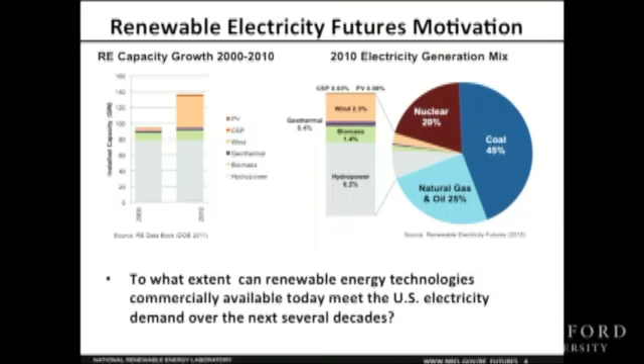And it's really quite enormous, and that's just the tip of the iceberg relative to the fact that there are about 115 countries that have some kind of renewable electricity law or goal in place. Renewables have really become—I'll change it from what used to be thought of as alternative to just being thought of as renewable energy. So it's no longer the alternative aspect. When you look at the annual growth rates in the United States or elsewhere, it's about 50% of new power additions each year. So it's really matured substantially.

So the questions we really had were a technical feasibility analysis. There are really 3 sub-questions here, but to concisely talk about them: can we meet load with the various supply options that we're going to look at? What's involved in integrating all of that new supply into the grid? That's a very simple question, but incredibly complicated to answer. I'll get into some of that and some of the variants that we looked at.

And can we exercise some really leading edge models with unprecedented both temporal and geographic coverage for the United States, which really haven't been exercised like this before? And then really explore what are the constraints, what are the synergies, what are the challenges, recognizing again that we're not going to do an in-depth policy study.

And the basic set of assumptions, again, driven by the demand side of the equation. We had a whole energy efficiency and demand team run and led by Donna Hostick out of Pacific Northwest National Laboratories. That team actually referred back to the National Academy's work on potential for energy efficiency, did some thinking deeply about the penetration of electric vehicles or plug-in electric vehicles, and came up with essentially a fairly aggressive baseline scenario.

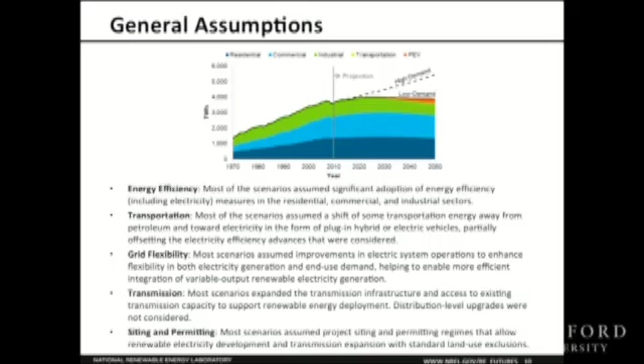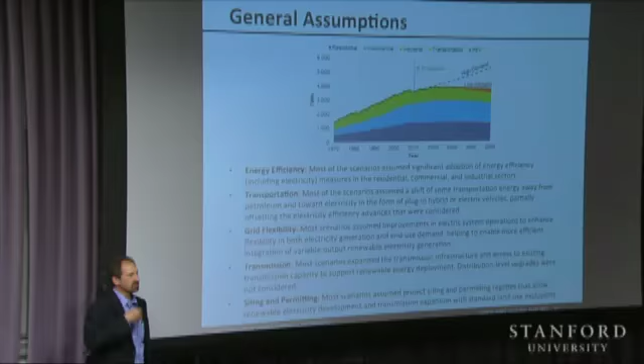Going out to 2050, this is essentially decreasing electricity demand, then with a slight increase from the transportation sector, making it essentially flat. That's fairly different than traditional growth scenarios, which have energy consumption essentially proportional to growth in GDP, and you would see 0.5 to 1 to 1.5% growth, which is our high demand scenario.

So there's a lot of assumptions built into the demand side of the equation that we put into our reference scenario, or baseline scenario, that have to do with that. And then we want to look at variance around that. Okay, so that's a very solid place and a key thing to remember as we go forward.

Resources - these are the maps, many of them that NREL produces. In fact, we update these relatively regularly. This is a kind of coarse scale map at the national level of biopower, wind, solar, geothermal, direct solar, so concentrating solar power is CSP, and hydro as well. There are details of this at very fine spatial resolution on the NREL website, and even more detail in the Western Interconnect and the Eastern Interconnect that we've used for other studies as well. But this is just a quick synopsis of that.

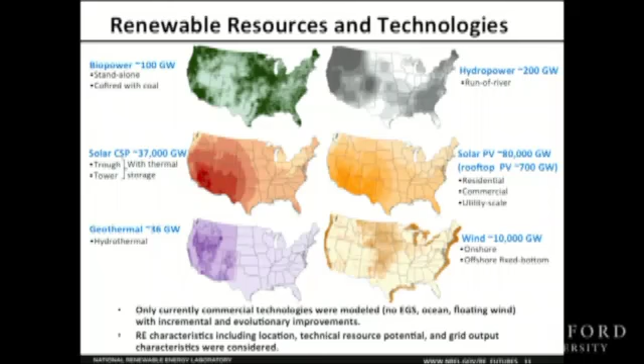I think one of the key takeaways to observe on this is the enormous size of the solar resource, which many of you are familiar with, but to give that some context, that's 80,000 gigawatts - I think I actually have a mistake in my slides going forward with the wrong number, but that's pretty enormous. And the other ones - this will come out because we actually did a resource constraint scenario where we looked at, well, what if this is wrong, or what if you can't get to it, or what if there are siting problems or development problems, and that'll be another insight.

So that sets the background of what we did, and let me just focus then on highlights of the results and then go through some of the scenarios.

So the first key takeaway, which was an output of the analysis because it wasn't predetermined, was: can the system actually meet hourly demand at 80% total renewable generation in 2050? And the answer we found was yes. You could, in fact, keep and meet today's technical requirements - ancillary reserve requirements, contingency reserve requirements, etc. - with 80% renewable energy on aggregate across the country, renewable electricity.

Okay, and so you see here what the actual power plant map and transmission map would look like for the 80% incremental technology, unconstrained transmission scenario. And you do note quite a difference. You see the build out of a lot of solar in the west, a fair amount of wind in the middle, a fair amount of biomass throughout the east, and then a significant amount of new transmission.

Now I'll contrast that with some scenarios where we in fact constrain the transmission, and you'll see some differences here. And then I'll actually show you some very nice visuals which will show you the build out of this, but also the hourly dispatch of it as it goes through a year, which is actually fairly insightful if you're visually inclined. So that's one of the most fundamental takeaways that came out of the study - this looks like it's technically feasible. We should look at it in some more detail. And what else can we learn?

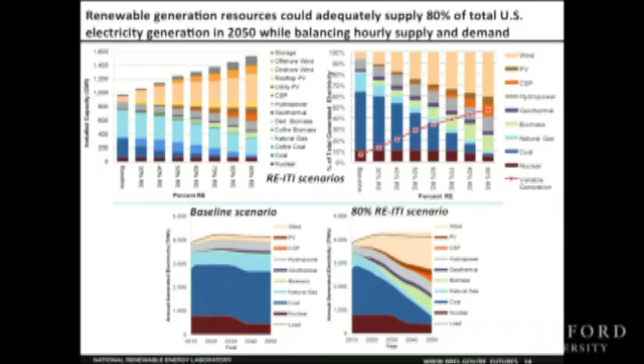Why is that? Because as an electricity modeler, you give less capacity value to the variable renewables as they increase their penetration going forward. So the 50th marginal percent of wind gets less value to the system than the 25th marginal percent of wind. That's because of the variability and predictability of wind, et cetera. That's all been looked at in a lot of detail, and there are a lot of references I can help you with on that one.

Hopefully you can read these in the back. These are stacked charts going from nuclear, coal, co-fired coal, gas, co-fired biomass, dedicated biomass, geothermal, hydro, CSP, utility PV, rooftop PV, onshore wind, offshore wind, and storage.

The other thing I failed to mention verbally in the modeling work is that we used a second NREL model called Solar Deployment System Model, Solar DS, to actually model where the distributed solar would be. We did that exogenously, put it into this one, and then solved the rest of the system.

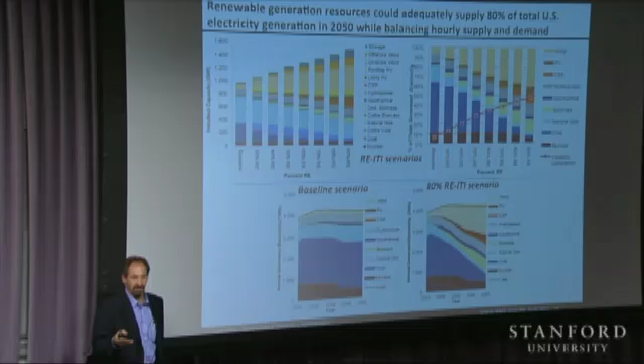The other piece here is this is the percent of total supply, and more importantly, this red line, which is the percent of variable generation as a function of the scenario. One of the important things I always emphasize with this graph, and in the discussion of the study, is that when we talk about 80% scenarios, it's 80% total renewables, not 80% variable renewables.

So you can see here in the 80% case, it's about 42%, if I remember the number correctly, variable renewable in that case, although it's 80% total. Why? Because we have hydro in there, we have baseload biomass in there, we actually have concentrating solar power, CSP, with storage so that it's dispatchable in there. Even in the 90% case, it's only about 45, maybe 46% variable renewables. So that's also very important to remember in the back of your head: we're not analyzing scenarios where it's 100% variable. It's less than 50%.

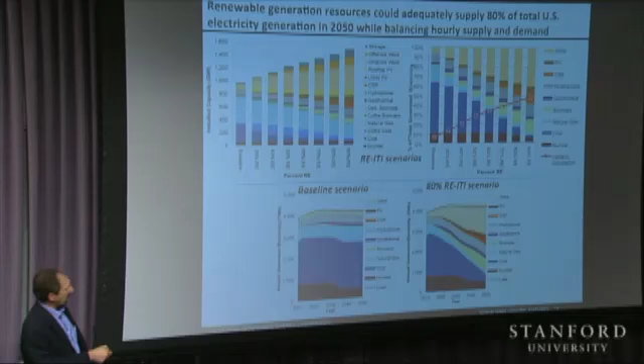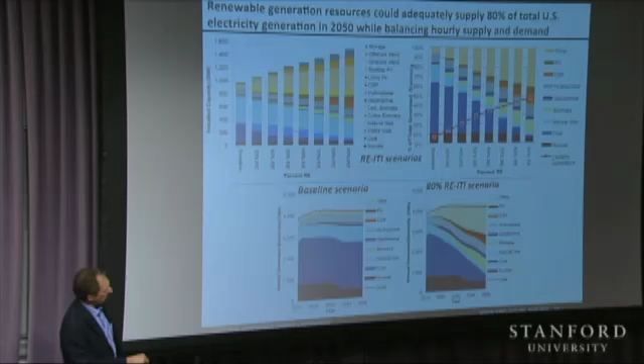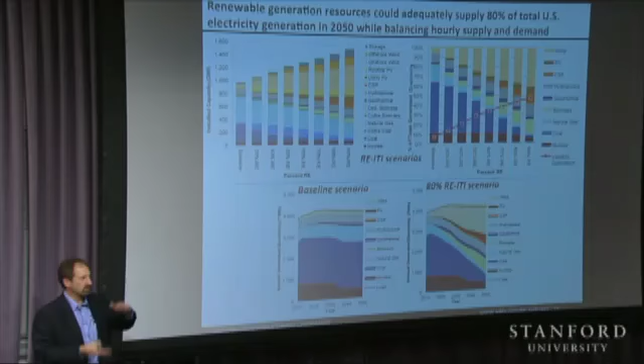Then here is the energy of the baseline scenario where you see, again, nuclear, coal, gas, and then the renewables, with flat demand going forward, relative to the 80% unconstrained transmission scenario where nuclear phases out, coal phases out quite a bit, gas slims down, and then you build up renewables on the side. This was done pre a fair number of changes here in the 2010, 2012 timeframe where you see a lot of switching between gas and coal.

It really wouldn't have a lot of impact out in the 2050 timeframe. It would reset the start point quite a bit, and I'll talk a little bit about whether or not fossil fuel prices impact the results of this study. The answer, just so you can think about it, is not really. The simple way of thinking about that is that it's really quite a small part of the overall generation.

Another key result, a synthesis across many, many different scenarios, is that there are many different combinations of renewable resources and technologies available in the United States that could potentially supply 80% of renewable electricity power. That's important to realize because each state has its unique set of assets, each region has a unique set of assets, and there may be preferential treatment toward a more distributed future, a centralized future, or protecting certain land areas or water areas. That would change the mix. So the question is, is there only one solution or a whole variety of potential solutions? The answer is there's a whole variety of potential solutions.

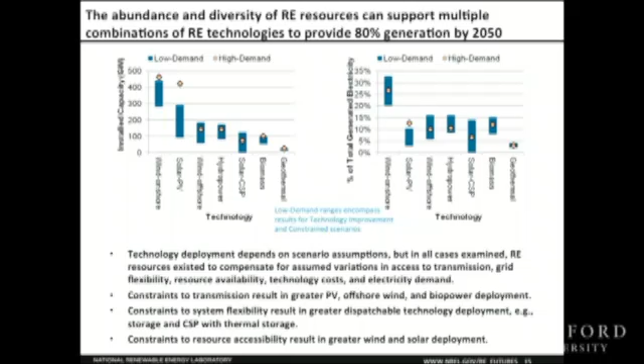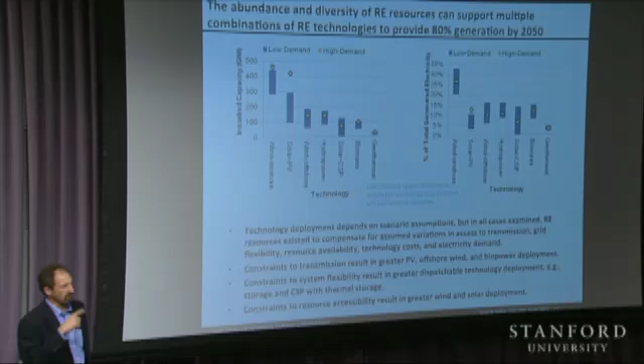There's some notable pieces, for example, solar CSP. There's a scenario where we calculate that zero CSP is actually added to the grid. Now, it's not very feasible given what's already in the pipeline, but economically, that's kind of put there. But you could also see that you could build more than 100 gigawatts. That's dependent upon technology innovation going forward and the competition with other renewable resources, as well as, in particular for CSP, the availability of transmission to move it from the desert Southwest to other demand centers.

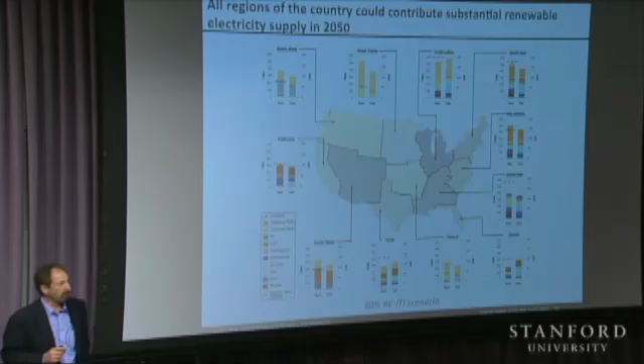One of the other key messages for us was really captured in the geospatial distribution of the energy supply. I'm going to show you a second map along this line with constrained transmission, but this one captures a lot of detail.

Let me use an example here, California. What you have on the left is the generation, and on the right is the capacity, and the little dashed line is actually the 2050 demand. So in California, basically, you meet the demand on an annual average from resources available in the state. Now that's a different situation for the Northwest, where in fact it oversupplies and therefore exports.

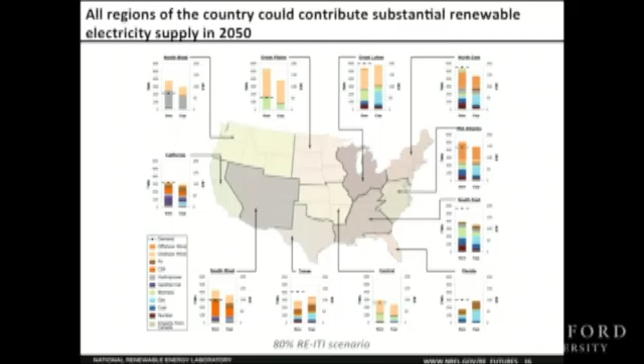Similarly for the Great Plains, where there's a lot of wind and therefore a lot of oversupply. This color map is the same - that's wind above that line, which is being exported. There's some deficits in Texas and Florida, but in the Northeast, from the offshore wind, they actually have a surplus and export. I'll show you that on a couple of visuals going forward. So this is a really important map because it shows regionally where supply is being met by relatively local resources, or where the trade flows, if I could use that term, between regions.

I deviated from the normal renewable electricity futures talk to put this slide in because I think it's really important. This comes from work we did for what's called the Clean Energy Ministerial, which is a group of 23 energy ministers that get together. Last year they asked us to do a comparative international case study of the best practices for integrating variable renewables.

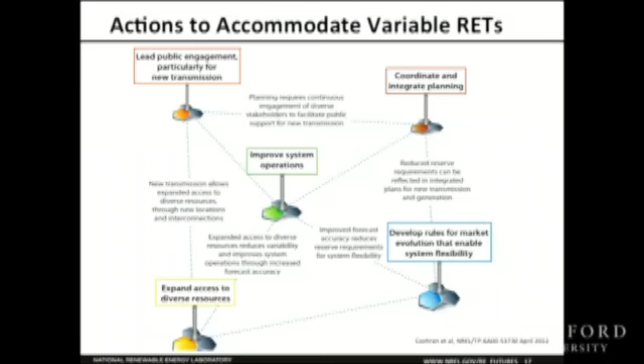This was kind of the visual map that came out of it, and there are 5 key steps involved, everything from expanding diverse geographic resources, enlarging balancing area authorities, developing rules for flexibility of markets, leading public engagement, particularly for transmission build-out, as well as market rules and things like that. I put this in as a reflection of what I'm going to talk about now, which is really about what a flexible system means if you're ever going to move toward a very, very high renewable electricity penetration scenario. This kind of gives the roadmap. That's a whole separate set of publications, but I think it's important to keep these in mind.

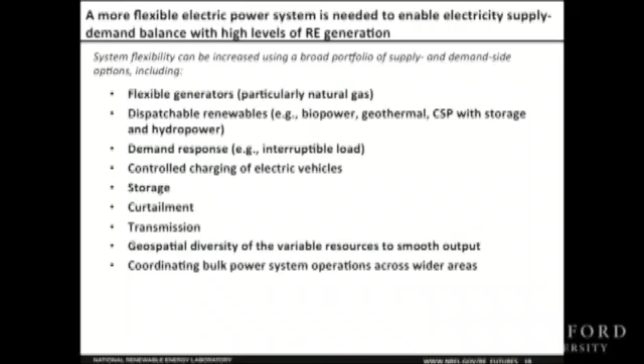So this is kind of, I'll call it a vision, just a bullet list of a lot of those options for flexibility. Everything from demand response - and we'll highlight some of those demand response aspects in the study - increased flexible generation, particularly from fossil resources, and I'm going to show you some detail of what that looks like. That raises a lot of hands talking to current utility operators in the U.S. Less so if you talk to them in Ontario - just depends on what's standard and what's practice. Storage, and of course coordinating power markets, etc.

So this is a really interesting set of results, and there are two extremes here. One is a set of peak demand days - hourly calculations from July, 3 days in July, actually 4 days in July, and an off-peak spring day. In a peak scenario, in the baseline, everything runs as traditionally designed. You have baseload plants, lots of baseload coal running flat out, hydro which ramps, then natural gas, 2 flavors of natural gas, and then a little bit of renewables on top of it, and this is the load requirement.

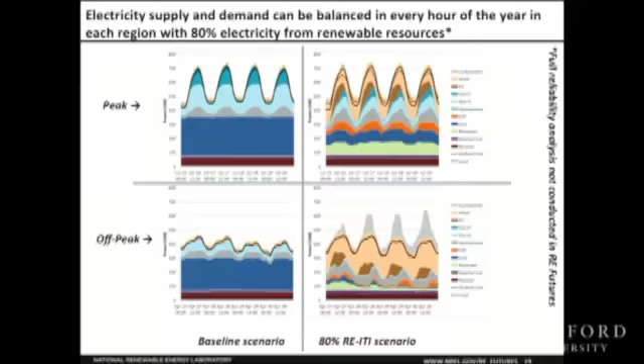The load requirement that we had is the black line, and then we introduce some demand response, some load shifting capability in the scenarios, and that goes from about 15 or 18, 16 gigawatts to possibly as high as 30 to 50 going forward. That may actually be a conservative scenario and set of assumptions.

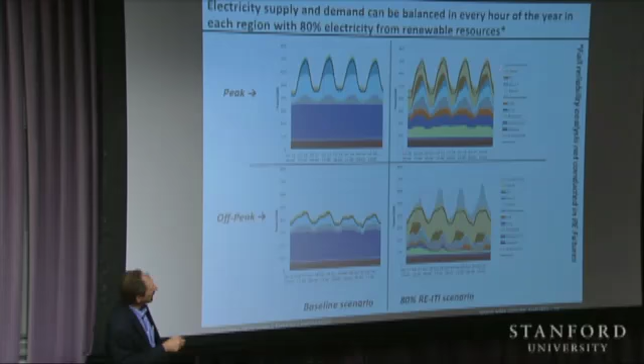But in this 80% renewable scenario, you still have some base load-like plants, but then you build up a very different stack of generation profile, still meeting the overall demand as it goes forward, and then you get this little slice of gray at the top, which we call curtailment.

It was one of the interesting assumptions we talked about for a long time, which is, what do you do with excess electricity if you have it? In this study, we chose to just call it curtailment. We didn't put it back in the system, we didn't recycle it, which would obviously be the economic optimal way of thinking about it. Here we just said it's curtailed, it's got a cost of curtailment, rather than thinking of it as a zero cost resource. So this all looks relatively manageable.

When you convert to an off-peak time, it looks very, very different. Here you see lots of curtailment, virtually no coal being used, and a fair amount of cycling, on and off cycles, of almost all the resources. It's an operationally very different challenge, but technically it's still feasible to do that. And again, those are the 80% ITI scenarios.

Sally, would you remind me how much time till 5 o'clock? 5:15? Like 5 minutes past 5. Okay, and then that will give us like 10 minutes for questions. Okay, alright, I'll keep going.

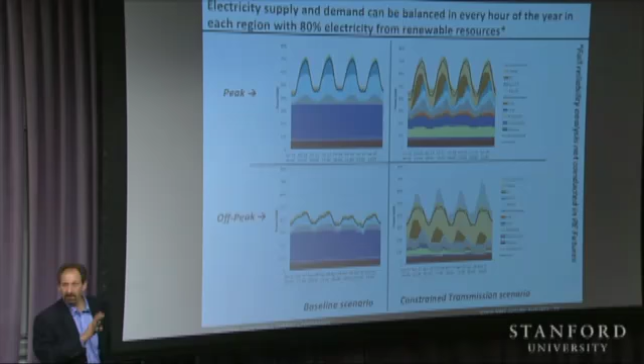And then we've got the constrained transmission scenario as well. Here you see again the upper curve is fairly regular. The lower one has significantly more photovoltaics in it, almost no concentrating solar power because you can't get the power from the desert Southwest to the demand centers. And then also some more offshore wind, but I'll show you that in more detail.

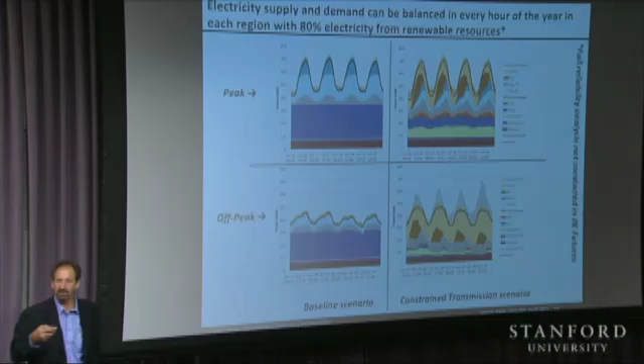Each of these solve, if I can use that term, over 8760 hours. They meet the reliability requirements of today's North American Electric Reliability Council going forward on an hourly basis. What this also means is that the flexibility requirements in our standard scenario on fossil generators are very different. Again, I mentioned Ontario ramps their coal plants when they have them, they're phasing them out, at 80 to 90% of a ramp rate of full capacity. That's very different from how our coal plants have been designed and operated. It's just a different paradigm of how you'd go about doing things.

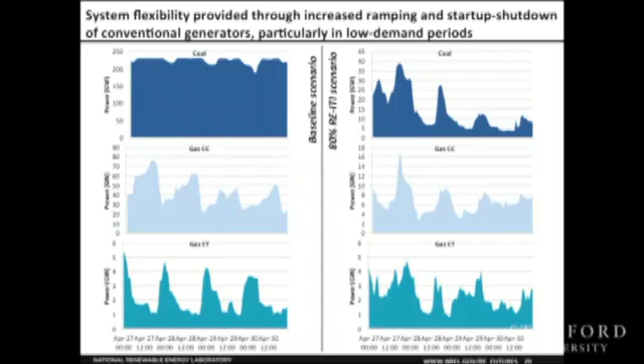But there are two things here. This shows gas combustion turbines, combined cycles, and coal in the baseline scenario, and then in the 80% unconstrained transmission scenario, and you see a lot more variability. You also see a lot less energy, of course, because most of the energy is coming from renewable resources. This looks like a headache to most traditional coal plant operators, not to some of the others who've been in different areas. Even combined cycle ramping may be very fast for old vintage combined cycle fleets, but not current vintage ones being sold in the system today. Combustion turbines are pretty used to that kind of situation.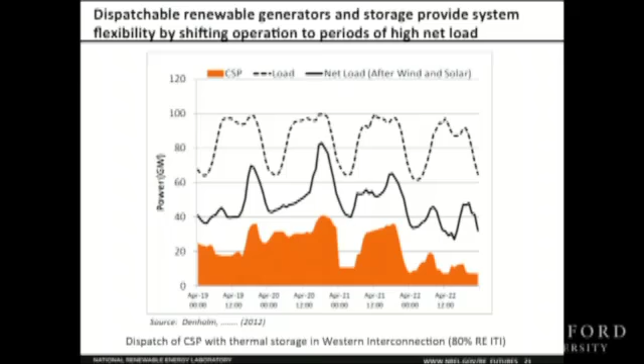This shows just a highlight of how concentrating solar power with thermal energy storage actually dispatches. So this is a load curve, this is the remaining load curve after the other variable renewables are subtracted from it. This shows then, if you actually have CSP with thermal storage, how it will dispatch into the peaks because it's economically optimal to do that, as well as technically feasible. Just another small highlight of things. A couple tidbits on then constrained scenarios.

So what we wanted to do was ask the question: have we been overly optimistic in thinking about an economically optimal situation where you could actually build transmission? That may not be the right question. The real question is, if you could not build transmission—because it's expensive and very slow to build out due to interstate rules and all the constituents involved—could you still meet 80%? And it turns out you can.

In our baseline scenario, it's actually an enormous amount of new transmission—110 to 190 million megawatt miles, about double our current transmission system. People might say, well, that seems like an excessive buildout.

So what if we constrained that? We essentially limited any new transmission to existing corridors, not new ones, and no new interconnection ties—so ERCOT, for example, stays isolated. Then we reran the scenarios and asked, can you actually meet the 80% requirement?

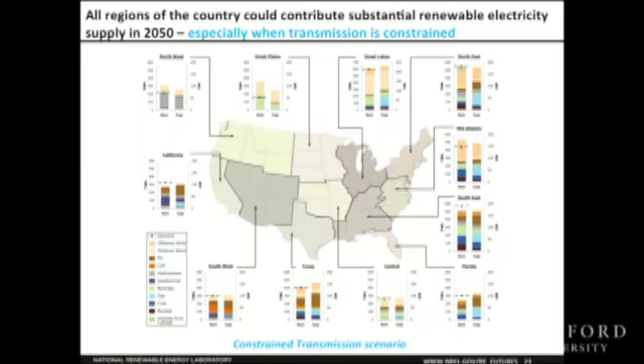The answer is yes. What do you trade off? You trade off local resources for faraway resources, and that's a trade space people need to be aware of and think through—how much PV goes on a roof, how much local wind or local biomass is developed versus, say, wind in the Great Plains with a transmission line across states. This is a complicated set of comparisons, but I wanted to spend a little time so you can see some of the trade spaces we found.

in those constrained scenarios—either constraining transmission or constraining flexibility. What does that mean? It means we increased the flexibility requirements on the system for dealing with the amount of renewable generation, so the capacity value of renewables decreased. Reliability requirements actually increased quite substantially, and the flexibility of fossil fuel generators decreased.

So you can see more operating reserve requirements in that system in terms of total capacity, because each reserve plant contributed less to the overall system. You can see some of this trade space quite a bit.

In particular, when you constrain transmission, this went from 120 down to about 30 million megawatt miles. You can see comparable reductions in T&D losses, etc. There's also quite a bit of storage—new storage being built goes from about 20 gigawatts today to about 120 to 150 gigawatts. So there is new technology being built going forward.

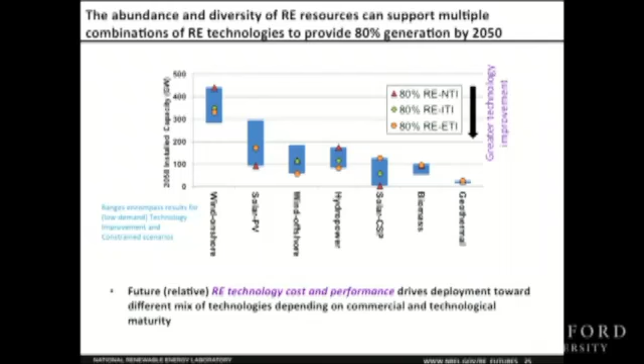This shows about the same graph as before, but it shows the impact of those technology assumptions in terms of where things go. With no technology improvement, CSP doesn't contribute significantly to the system in 2050, but with evolutionary technology, it really does contribute quite a bit.

So there's a lot of technology improvement opportunity in the CSP world, and the other resources are a bit more mixed. We pretty much use all of the geothermal available and almost all of the biomass available in any of those technology scenarios as well.

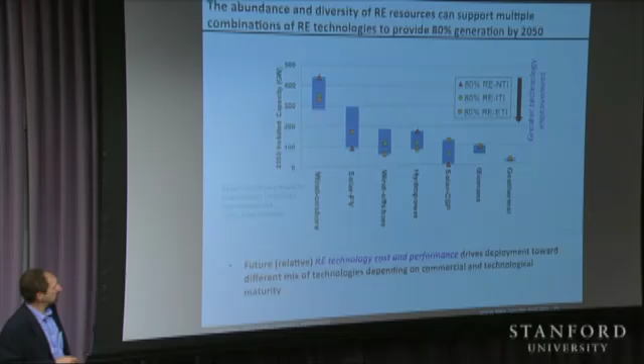A couple of the outputs, just to think through it. So one would anticipate that we see concomitant reductions in greenhouse gas emissions from the power sector. We do see that, about 80%, either on a burner tip level or a life cycle emissions level. We also see reductions in water demand and use in the power sector, which also could be an increasingly important aspect to think about as we go forward.

And then we're always asked, well, doesn't that use a lot of land? So we looked at those metrics as well, both for fully disturbed lands and marginally disturbed lands. You can see some of the comparisons here relative to golf courses, corn production, and major roadways. Here's the numbers - I think that's up to whoever wants to read the study and think about what that means for your locality or for the country relative to the trade spaces of having the greenhouse gas reductions, the water reductions, et cetera.

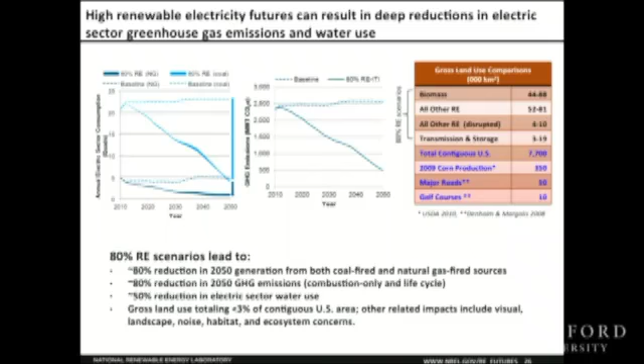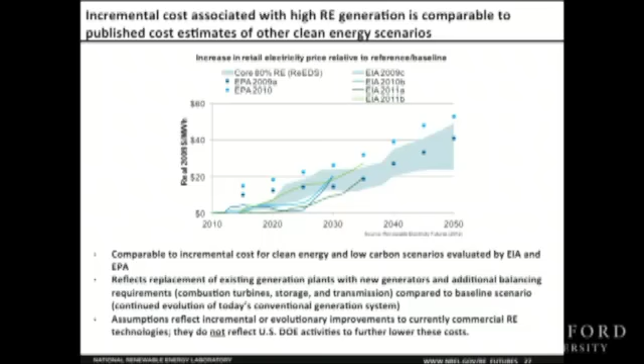Economically, we also looked at the impact on direct costs on electricity prices. These are average annual electricity prices in the different scenarios. What you see here is a comparison against a number of different studies that came out from either the EPA or the Energy Information Administration, relative to the range across all of the Renewable Electricity Futures Studies, which is the light blue swath in the back. You can see that our calculations are in the same ballpark, and in fact potentially lower in the outer years. Again, this depends upon the energy technology cost assumptions much more than on the fossil fuel assumptions as well.

What we didn't include in these was the cost of the energy efficiency investments. We, of course, didn't look at household expenditures because we didn't do a full economy-wide model. So these are direct expenditures only, including all of the transmission upgrades or new builds that would be in there as well. So it looks fairly reasonable relative to the other analyses at that time and would need to be looked at in much more detail going forward.

We also looked at the sensitivity of the different prices relative to different input assumptions. The key thing to look at, as I think about it, is what's the sensitivity in the price relative to technology improvement, constraining the transmission, or any of the other constraints, demand, or fossil fuel prices. And of course, because fossil fuel doesn't contribute a lot, the sensitivity is relatively low.

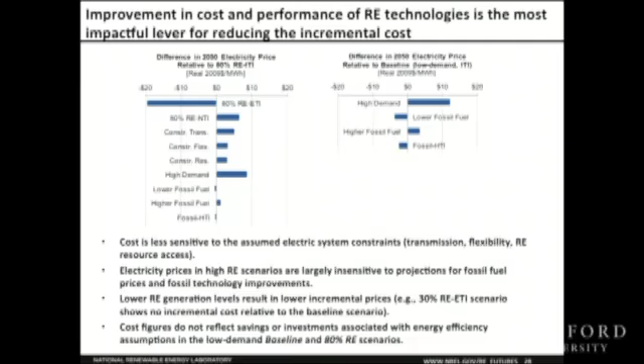Demand drives up price, as you would expect, because you'd have to build more supply, and a lot of that supply has low value. But the most interesting part, particularly for those sitting in a research university, is in fact the enormous potential impact of technology innovation. It really is, I think, motivation for us to just work harder, particularly in today's low gas price environment.

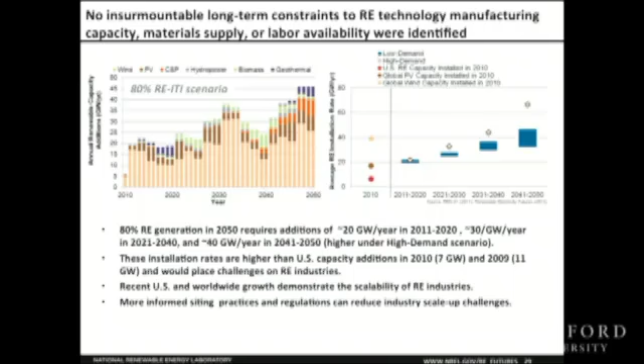We looked at the manufacturing capability. This just shows an annual build out of what the annual installations might look like, again, on an economic optimization, not on a business perspective - somewhere between 20 and maybe as high as 40 or 50 gigawatts. That's not really unsurmountable compared to both US installations as they have been, but also worldwide installations and worldwide production capacity as they have been. So the takeaway was, industry probably could respond to that and would actually probably like that, to be able to really grow and work that well.

The other piece I want to spend a second on is really this impact of high demand. I think it's really important because those base assumptions of really implementing energy efficiency tend to get lost in the messages because it's a study of renewable electricity futures. But as the national academies have done, and many studies out of here and elsewhere, the energy intensity of the US economy is enormous compared to most other countries. And while California leads the pack and has done for decades, the rest of the country has a long way to go to really catch up on this.

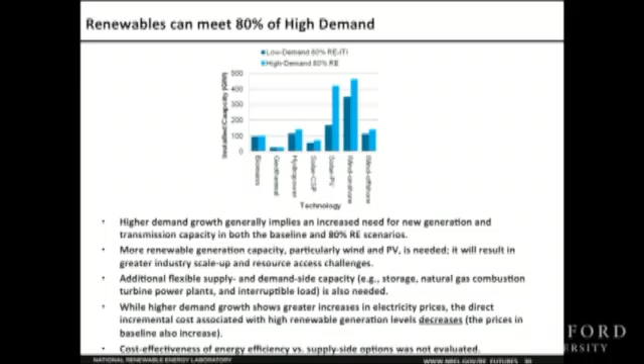This just shows the impact on the requirements for the different technologies going forward. We would have to build a lot more supply and deal with a lot more of the flexibility integration if we were not to curb our increase in demand. I think it's worth thinking through what that really means, particularly given overall national consumption levels.

So key results, there are 4 here. I'm not going to read through them. I think the key thing is that we found in a technical assessment that up to 80% renewable scenarios are technically feasible on an hourly basis, meeting today's reliability constraints and requirements. A number of different constraint scenarios and sensitivity scenarios also indicated feasibility at the national level for meeting those kind of renewable electricity futures. Such a future would require more flexibility both in the operation of the system, but also going forward in the policy and market design elements of that system itself.

The abundance and diversity of US resources really allows us multiple different pathways. We didn't decide on a given pathway. What we wanted to say is, are there multiple pathways? And I think the answer to that is absolutely yes, given our resource base.

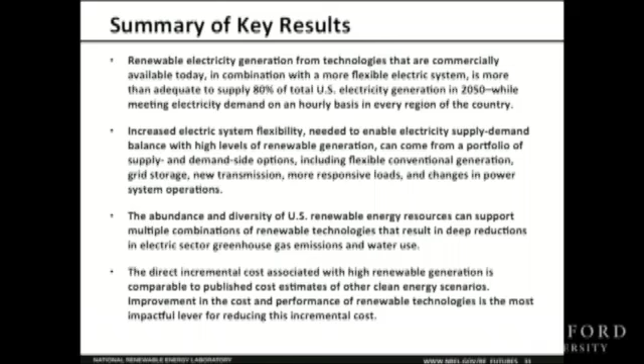The incremental cost is actually comparable to other analyses of decarbonization of the power sector done at that time, and might be the same for those done today, which are not enormous—they're real, between about 0.5% and 1.2% per year going forward. So they're not a large leap, and that's on the power price, not the total cost of power, because if you look at reduced demand times the quantity of the price going up, actual expenditures may or may not be flat or decreasing depending on your own individual use.

Where are we going from now? We have a lot more rigorous reliability assessment to do—sub-hourly, looking at frequency response, looking at contingency outages and things like that. We have a lot of work to look at the market flexibility issues and the policy side of that equation going forward. We're in discussions with DOE now about what that might look like. And then, of course, continued work on the technology innovation side, which is one of the most important factors on the cost of realizing such a future.

So let me skip through that. What I really want to do is, while we do questions, show a couple of visuals, if I might. I hope I can get these up.

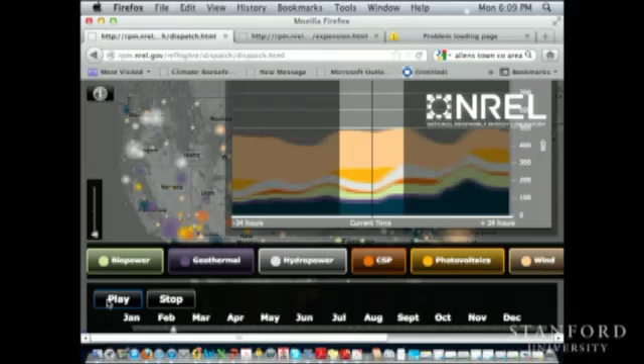It's nrel.gov slash REFutures. So thank you for your attention. Thank you for inviting me out, and I hope that captured the highlights.

Okay, questions? Okay, how about you, Charlie?

Hey, that's a great study, a lot of valuable insight. I'm curious about the storage energy capacity—it has about 110, 150 gigawatts of power capacity. How long is that discharge? A couple hours, 6 hours?

That's a good question that I don't have the answer to off the top of my head. We can dig it out of the actual energy supplied by it. Off the top of my head, I think that it's less than...

It's less than about 8 hours per day on average total, but we can look at the detail and get you that. The trade space between storage and demand response, when we took on this study 3 years ago, was a fairly broad unknown. We restricted storage to well understood, well characterized technologies—no advanced batteries, just things like pumped hydro. Demand response at that time was a pretty big unknown. There's a new technical feasibility study of demand response for the country coming out soon by DOE, and I think our estimates here are actually fairly low relative to what that will show. Storage is called upon just a little bit, also because it's expensive, but it's needed.